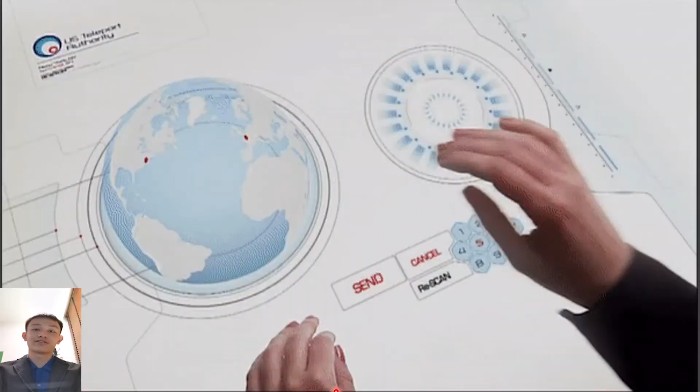Although it's a fiction invention, what if someday this becomes a technology product in our life? Just a command, and we can travel between spaces instantaneously. Imagine every day our usual transportation is teleportation. You don't need a road to go anywhere. Map navigation will become outdated. Terms like distance and traffic congestion disappear from our cognition. It is an absolutely perfect way to travel around.

However, based on the state of the art, this is still neither technically nor scientifically possible for humans. Even though you might realize how far we are from that mode of transportation, engineers are researching and figuring out how to minimize travel time and increase the capable travel distance between spaces as much as possible.

I am Chong Yao from the University of Southampton, Malaysia. Today, I'm going to talk about how far we could go in transportation. I will introduce to you two futuristic inventions in the field of transportation. Let us look forward to them because they are going to be real in the future.

As we know, the human body is not designed to stay static all the time. We have muscular legs. We could walk, sprint, and squat to move anywhere we'd like to. Human ancestors could hunt for food and not get starved to death.

Even so, curiosity is an essential spirit amongst humans. The ancestors wanted to explore more about the world they were living in than just a stone's throw away from their shelter. Our legs were no longer fulfilling us. This motivated us to figure out how to get faster, further, and safer to anywhere we want.

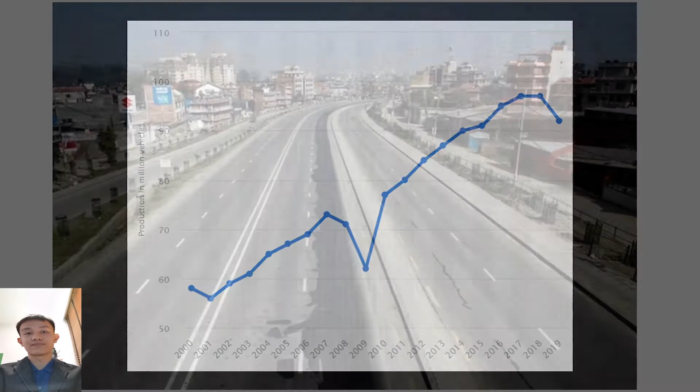The production of vehicles in the industry is still increasing. The requirement is always on demand, and the usage of vehicles is again rising continuously. So we cannot deny the mobility that transportation brings to us and society.

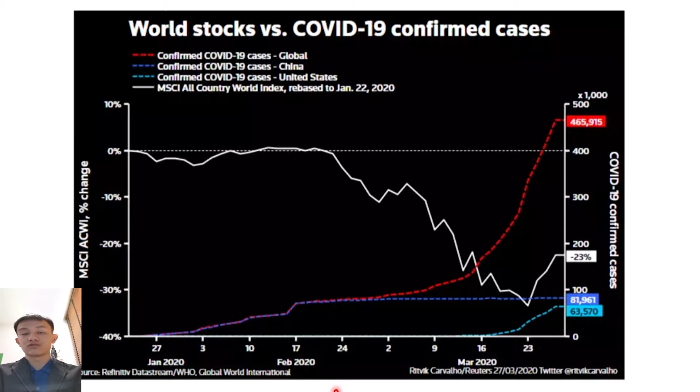The recent pandemic, COVID-19, has limited transportation availability due to numerous lockdowns of countries and travel restrictions. Enormous implications have been caused by the coronavirus on global economic growth. It is very inconvenient for today's world without the presence of transportation.

Okay, let us wind back the time to the 1960s. After the first lunar mission, we realized that the Earth is actually just a borderless blue sphere. Space exploration became a popular subject for every science pioneer during that era. However, until now, to travel or to carry anything into space, the only way is through the rocket. Most of them are chemically powered, and this is its structure.

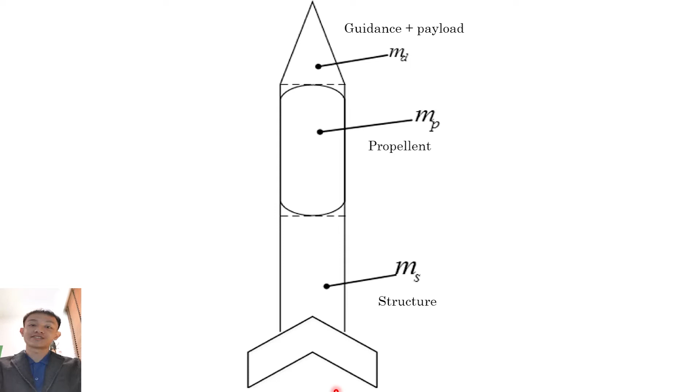Okay, let's simplify this. Much better. So rockets are mainly made up of four components: the guidance, payload, propellant, and structure system. Our ultimate goal is just sending the payload and guidance system into space, which is only this part. The rest, the propellant systems, as well as motors and supporting structures, are abandoned after burn-off to reduce the overall weight of the rocket.

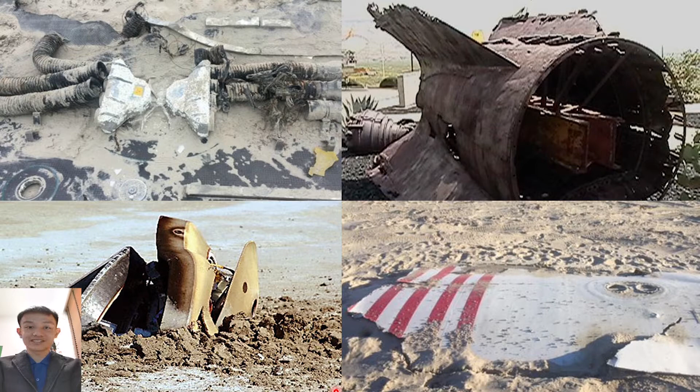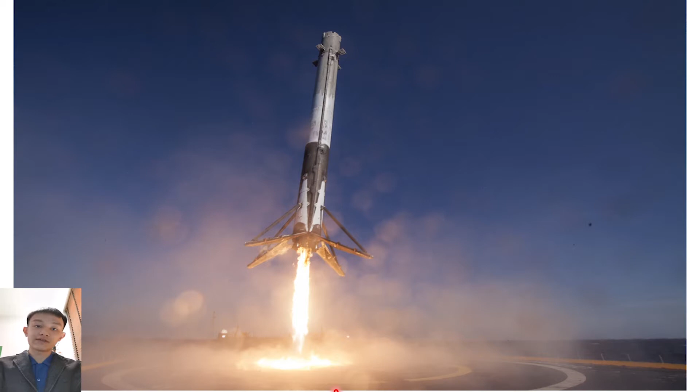A lot of infrastructure will be wasted during the staging process. Statistically, it is more than 90%, just to ensure the thrust could overcome the drag and gravity. That means most of the energy is dissipated unintentionally, resulting in an expensive but poor efficiency system. Even the latest reusable rockets will throw away over 75% of their initial mass.

The good news is there is an innovative planet-to-space transportation system that was introduced in 1895, and that is the space elevator.

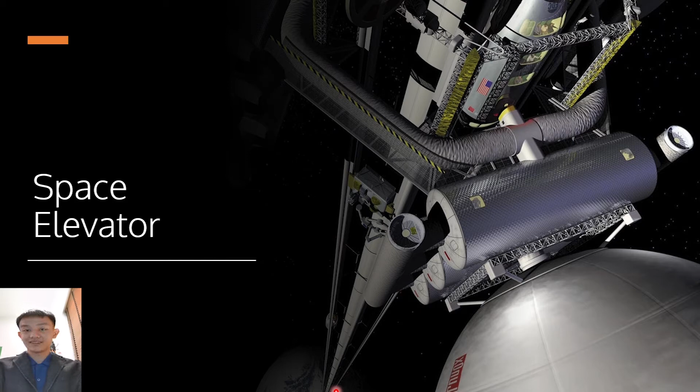It is envisioned that the cost of transferring artificial satellites and astronauts to space will be reduced up to 1,000 times and will be more reliable in terms of safety measures. It will certainly be a game changer in the economy of the space industry.

That sounds pretty good, but during that time, it only appears in engineers' imagination because there is no material qualified for the cable or the tether. It must be lightweight and have incredibly high tensile strength. Such high specific strength is unlikely to be manufactured at that technology level.

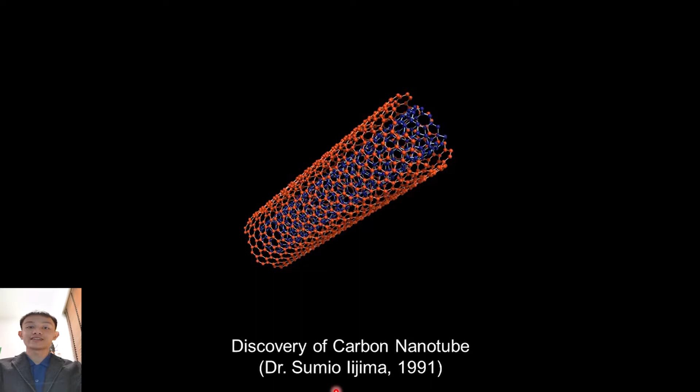Until our technology could be conducted in nanoscale, as known as nanotechnology. Nanomaterials such as carbon nanotubes are able to withstand their own weight as well as the climber's additional weight. It is 100 times tougher than steel and has plastic flexibility. This supernatural material can be the main tether composition, and it has enlightened us to once again believe in the possibility of the space elevator.

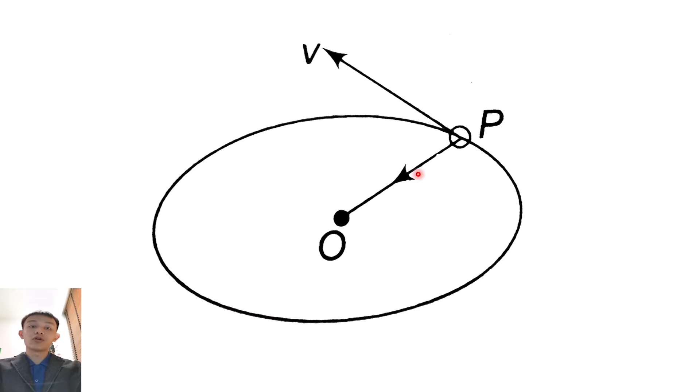So how does a space elevator work? Think of a ball attached to one end of a rope. In this analogy, the ball is a counterweight, and it could be a satellite. The rope is the carbon nanotube composite tether, and the center is the Earth. We know that if we roll this circularly, the centrifugal force will stretch the rope out to its full length.

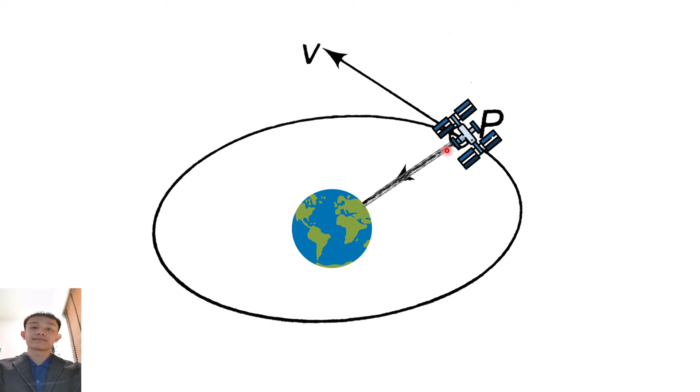Back to the real case, a stationary land or oceanic-based platform is built from the Earth's surface, reaching to the height of geostationary orbit. This is the draft design of the Earthport. It should be isolated and have the maneuverability to avert high winds and falling space debris.

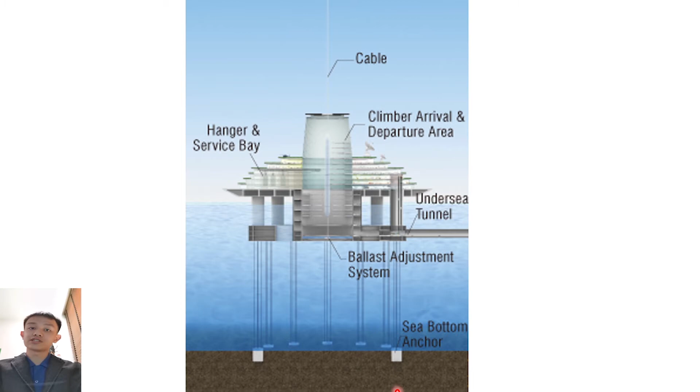A geostationary orbit is an orbit that has the same rotational speed as Earth's equator. It is approximately 36,000 kilometers from us. If there is a satellite revolving on the orbit, it will be relatively static with the equator. The tether will first be installed on a geostationary satellite and dropped until it reaches the equator surface. The tether will be anchored on the base platform.

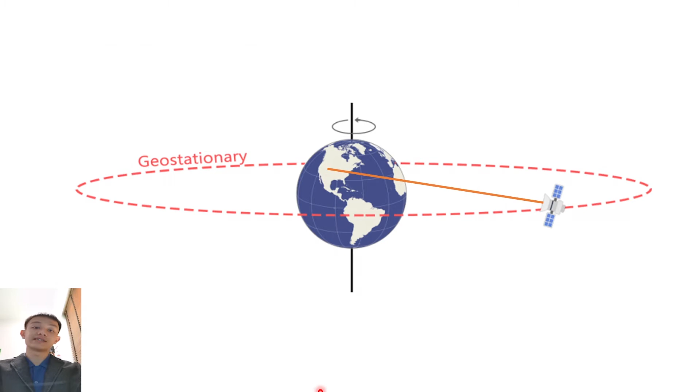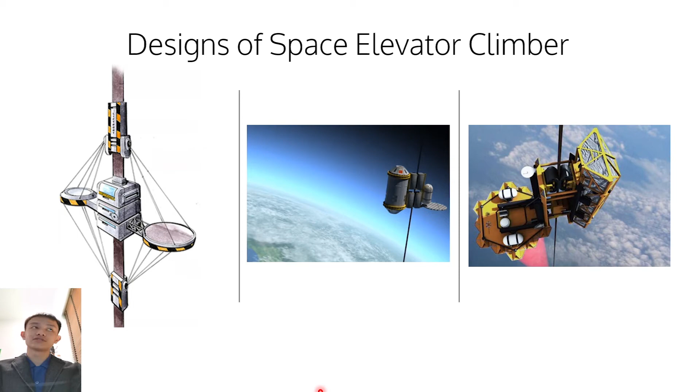Next, we have the climber. There's a wide range of designs, but it will not have the same structure as the elevator in common sense. It is still a controversial topic about how the climber should ride the cable. For now, developers propose using electromagnetic mechanisms or rollers. Additionally, to maximize the work rate, lighter climbers are more preferred and would be sent up several simultaneously, with the pace at correct timings to minimize cable stress and oscillations.

About its electric power system, there are several methods to pull up the climber while it's rising. It could be wireless energy transfer, but this is pretty much difficult to achieve as it needs to travel wirelessly up to 10,000 kilometers. Storing high specific energy such as nuclear energy works, but in a risky way. Solar energy, the solar panel could be installed around the climber, but it could only function under optimal weather conditions. There are pros and cons among these options, so examination is still being done at the current stage.

The energy is not supplied throughout the whole elevation. Once it has reached the geostationary orbit level, there is no more gravitational pull on the climber from the Earth. The motion will be consecutive due to the centrifugal force. Just a deceleration is needed once it reaches its destination.

The center of mass of the whole system should be above the geostationary orbit, around here, or else it will collapse like a free body. So the tether extends from the opposite side of the geostationary satellite until it reaches the counterweight. It can be a spaceport or an asteroid. Here the LEO means low Earth orbit, while the HEO means high Earth orbit.

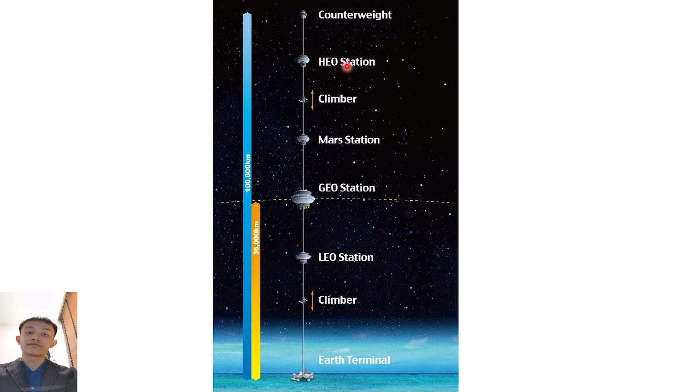Compared to rockets, a space elevator would be a less expensive, quicker way to get payload and individuals off Earth, because the difficult part, which is taking off from the ground, has been abridged.

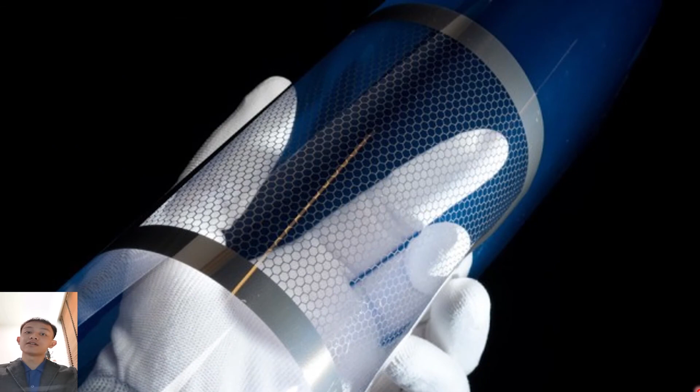Currently, due to Japanese researchers' deep proficiency in the field of carbon nanotube technology, Japan's space elevator companies are actively researching and experimenting. They have successfully determined the construction procedure and come out with a schedule for it.

Let's translate this. Okay, good.

From the figure here, we will see that it will take up to 20 years to manufacture the cables, and another 18 years with more than 500 times of reinforcement, it could handle up to 7,000 tons of climber.

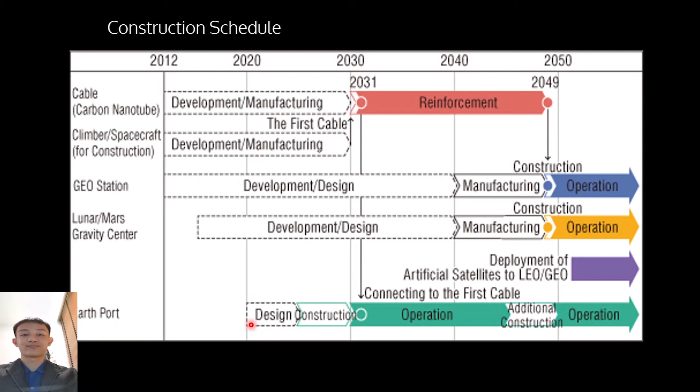The climber has started manufacturing since 2012, same with the geostationary station and Mars Moon Gate. In this year, construction of the Earthport has started. As you can see from this figure, there are different stations and gates along the tether.

One of the Japanese space elevator companies, Obayashi, planned to complete a space elevator project in 2050. Everyone could depart from the Earthport to the geostationary Earth orbit station terminal, even for vacation, they said. The space elevator will not only be beneficial to astronomers, but it could also fulfill people's space traveling dream.

What about a dream of traveling in a tube without blockage? Do you still remember the 4 modes of transportation I mentioned earlier? Now I will introduce the 5th mode of transportation, which leads to my second topic today. It is called a Hyperloop.

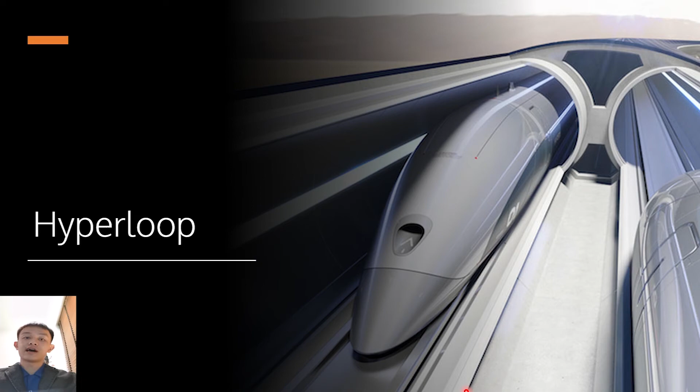It's a low-pressure tube system which lets a capsule travel in an environment with negligible air resistance. How fast could it be? In theory, its speed could reach 1,220 km per hour, which is 10 times faster than a car driving on a highway. It could carry either goods or humans.

Isn't it too dangerous for a human to travel at that high speed? Or can we even adapt to that? Well, it's actually similar to what you feel inside an aeroplane. The capsule accelerates until it gets to that traveling speed. You won't feel you are moving faster than a Boeing aircraft due to the law of inertia.

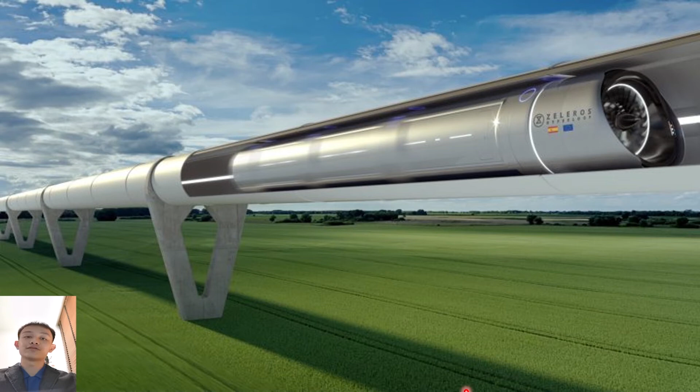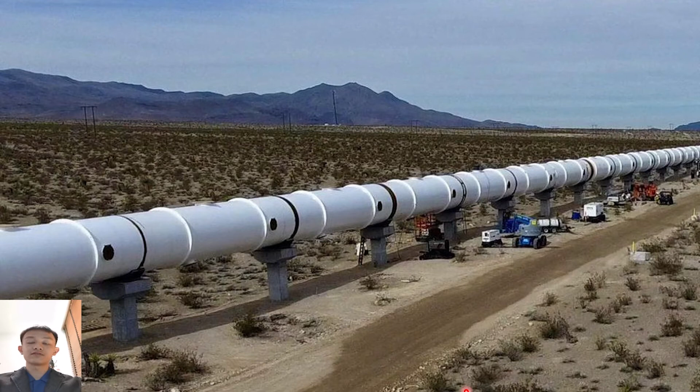Other than that, many safety measures have been considered. The pipelines will be constructed by thick steel that is difficult to break or puncture. Additionally, they are engineered to maintain their structural integrity. There is also an emergency system that could repressurize sections when there is any sudden influx of external air. Sensors are installed along the route, so if there are issues, it will report immediately.

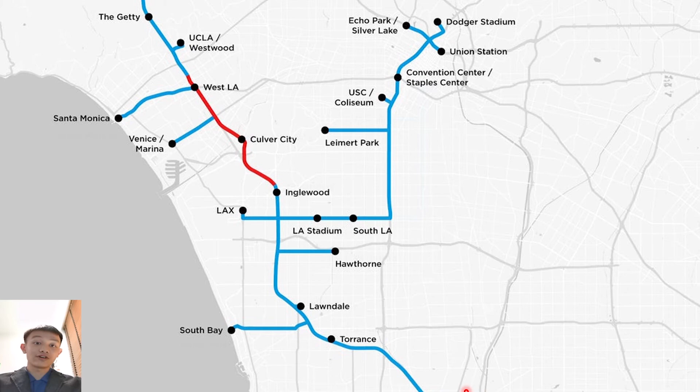Nowadays, there are constructions of a tunnel network for Hyperloop in cities of the United States. Hyperloop companies are researching and testing in their various programs currently. If a global Hyperloop network is installed on the Earth, people could travel anywhere within half a day. There are two mechanisms to achieve this transonic speed: the application of magnetic force and the depressurized tube.

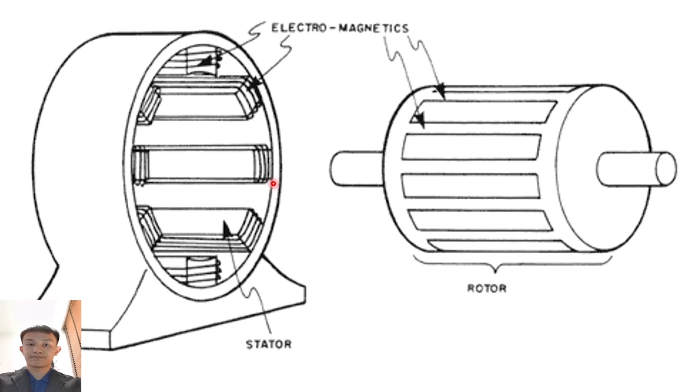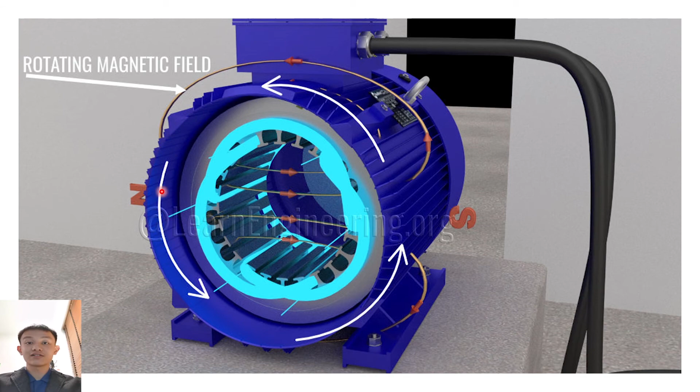Then a rotating Lorentz force is created too. For the Hyperloop case, instead of circular stators, the stators are installed linearly, as shown. At the same time, the rotors are also installed linearly on the pod. Not a rotating force, but a linear force will be created. This force pushes the capsule consecutively, and a computer electrical system controls it to accelerate or decelerate.

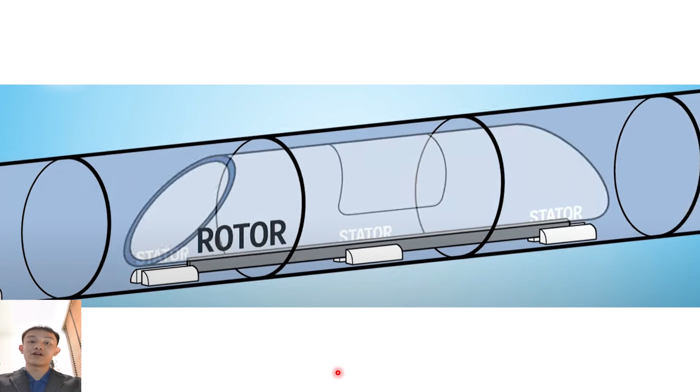Next, we have magnetic levitation. This is an arrangement of permanent magnets named Halbach array located on the pod. This configuration combines the induced magnetic flux, producing a more powerful magnetic field strength on the bottom side. In contrast, the upper side is eliminated without changing the magnet properties.

On the other hand, the track will be manufactured by aluminium. It's a conductive material, so when there is a changing magnetic field over its surface, eddy currents are induced within the surface. A mirrored magnetic field is produced instantly. The pod and the surface will repel, and this is why the capsule could float on the air. Compared to the maglev train we have right now, the Hyperloop system will be more efficient by minimizing power infrastructure.

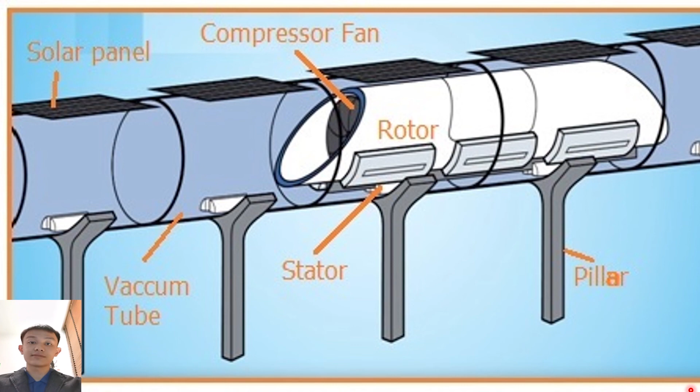Second, the capsule must stay in a depressurized tube where most of the air has been removed. The operating pressure of the Hyperloop is only 100 Pascal. It reduces the drag force by 1,000 times relative to sea level conditions. Despite that, there will be low pressure air in front of the capsule, creating an air cushion which will decrease the capsule's speed. To overcome this, a compressor fan at the front redirects air to the backside of the capsule to create extra propulsion force, making the capsule even faster.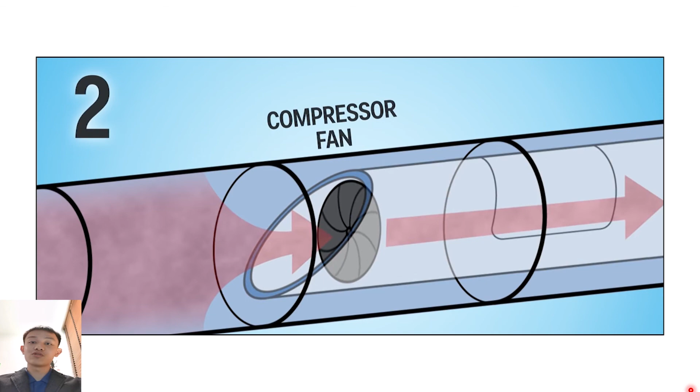Hyperloop power systems use renewable energy, wind energy and solar energy. It will reduce fossil fuel pollution from commercial transport by around 50%. It will be accessible to the public in the US by 2022 and worldwide in the future.

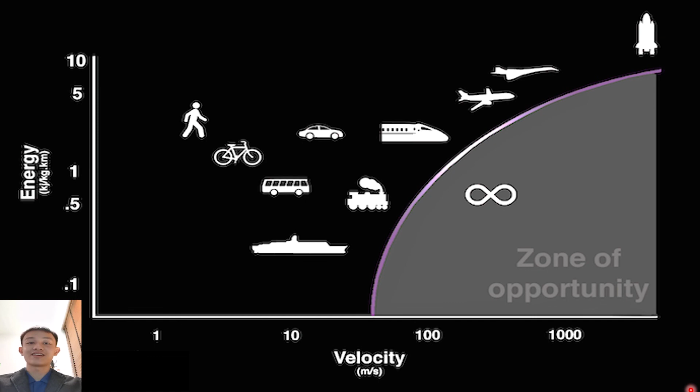Till now, I've found that these two inventions are indeed beyond our imagination. Without attempts and effort, how do we even know they could actually work? With that being said, our curiosity and innovativeness won't stop us here. There is still a zone of opportunity waiting for us to discover. I'm glad that we are taking one step further towards the pink door, as the technology awaits for us, becoming more than just ideology but a reality. Let us continue until we reach the doorknob. Thank you.